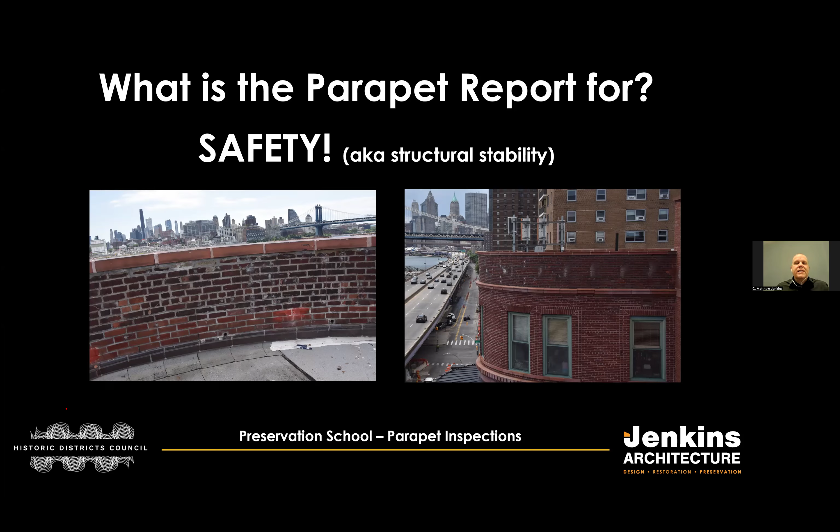Why did the DOB decide all of a sudden, a year and a half, 2 years ago, to start doing these? And it's because of safety. So the actual terminology is structural stability, meaning the parapet must be maintained in a safe condition. And what does that really mean? It means that things shouldn't be falling off of your parapet. Your parapet shouldn't be in danger of collapsing or falling onto somebody. And so that is the reason. It makes sense, right? The DOB's focus, Department of Buildings focus, is on safety. So this is what the parapet report's for.

Now, there is a crossover into something called Facade Inspection Safety Program. This is called FISP, or Local Law 11. This is for inspections required at buildings over 6 stories. It's submitted every 5 years to the DOB. You need a licensed architect or engineer. It's a crossover, but it is not the same report as a parapet report, just to make that clear. Over 6 stories, meaning if your building is below 6 stories, it's not part of the facade inspection. That is why this parapet report is essentially for all buildings. It doesn't matter if it's below 6 floors or above 6 floors.

So this started January 2024, where every owner must have an observation of the parapet performed in accordance with the rules. You can see it got distributed in November, right before January 1st, 2024. And so this is pretty much the new rules, the latest DOB direction for all buildings. So, like I said, I apologize. I want to start at the very beginning.

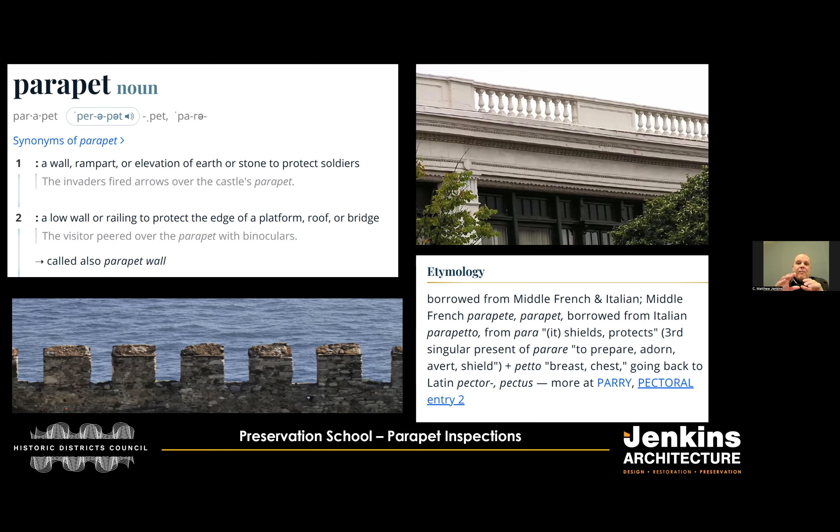What is a parapet? So Webster's definition is a wall, rampart, or elevation of earth or stone to protect soldiers. And I just love that idea that a parapet is actually something from a castle to protect soldiers during wars. It's a low wall or railing at the edge of a platform or roof, also called a parapet wall. So going back to the very basics of parapets. What is a parapet and what does it do? A parapet is an exterior wall that rises up vertically past the roof line. Typically, it will be on flat roofs.

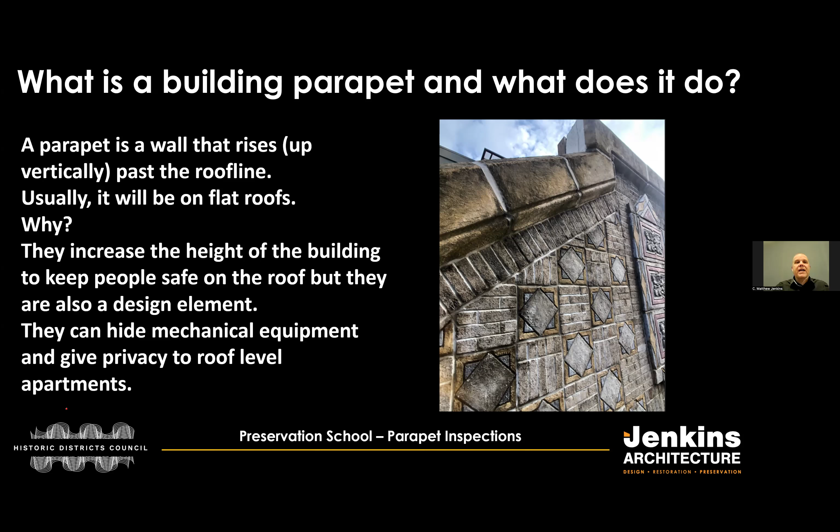And if someone were to say, well, why are they there? Well, they do a few things. They increase the height of the building to keep people safe from falling off of their roof. But also, because architects are always going to be architects, they become a design element for the building. People can put cornices on them. They can make a decorative parapet like this, with cast stone, different colors, and terracotta pieces. Also, parapets can rise up to hide mechanical equipment. They give privacy to roof level apartments too sometimes. So this is just really basic parapet terminology.

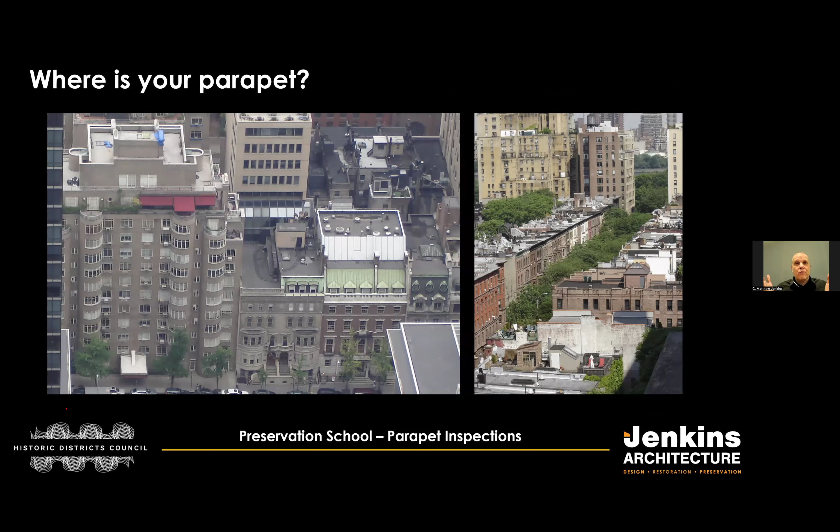So where is your parapet on your building? There is some confusion, believe it or not, about this, and I totally understand because it's all about the strict definition of what the DOB calls a parapet. So most parapets, if you go to the roof of your building or to a bulkhead of your building or to a terrace of your building, you will see a wall that rises up past.

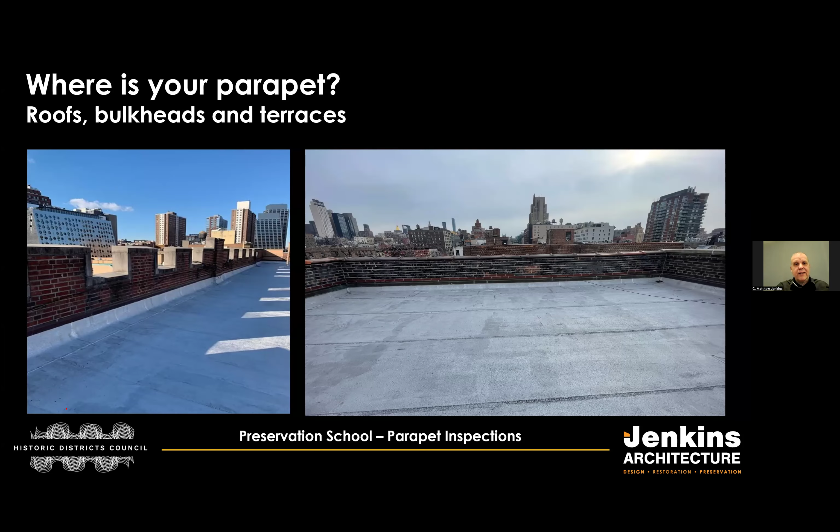What that is, that's your parapet. That is an exterior wall that rises up past the roof level. Now, like I said, there's a lot of confusion about do you have a parapet or not? And I'm going to go into detail on that. But this is where you'll typically find parapets.

So the next question, do you absolutely have to have your parapets inspected? So there are 4 basic rules on this. The requirement applies to all buildings, and the DOB has laid this out very simply, 4 topics. They say parapets that are fronting the right of way, I'll get into that in a minute, regardless of height. That means the building can be 1 story, 20 stories, regardless of height.

And then there's a few exceptions, which I'll get into in more detail too, essentially except for detached 1 and 2 family homes, which means if you have a detached 1 or 2 family home, and I'll explain detached, you don't have to do this. Also, the exception is if the building has a fence or other barrier preventing access to the exterior wall. So I'm going to talk about fronting the right of way first.

So the DOB's definition, Department of Buildings definition of a right of way is the public right of way, the public street space beyond the private property line, including the roadway and sidewalk. So that means the sidewalk, the street, anything where the public can be near your building, essentially, that is the right of way.

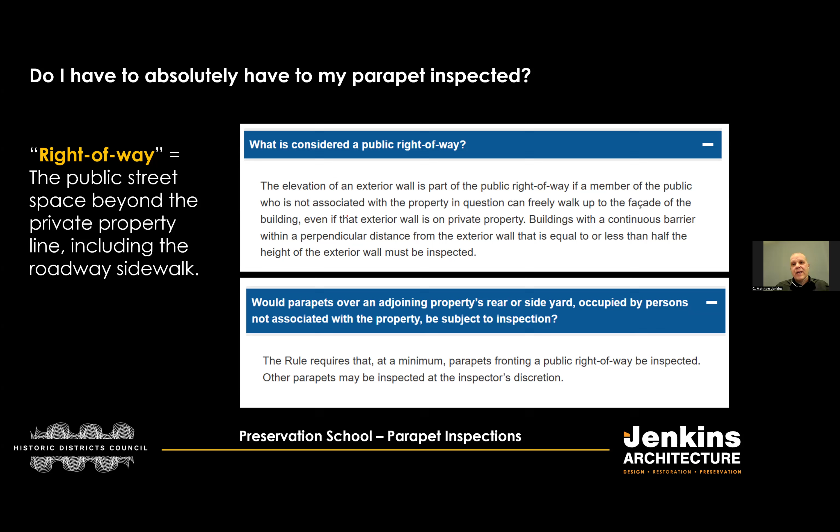Now, I don't want to ignore other parapets on the building, because once you're up there, you might as well inspect it all. But I just wanted to tell you this is what the actual written word is here. Now, regardless of height, I know this is probably the most confusing thing. Like we talked about before, Local Law 11 or FISP is over 6 stories. This is any height. If you have a 1-story building, you have to have it inspected. If you have 2 stories, 3 stories, 4 stories, this is basically every building, right? And so that's one thing I want to get across.

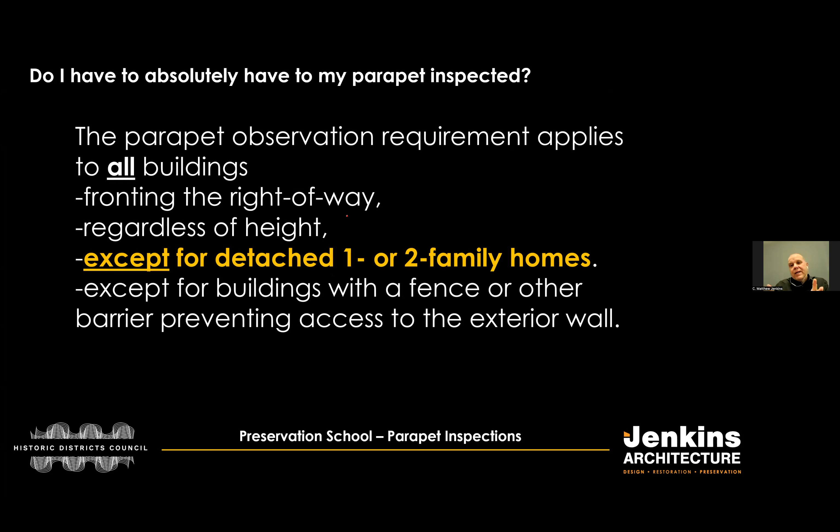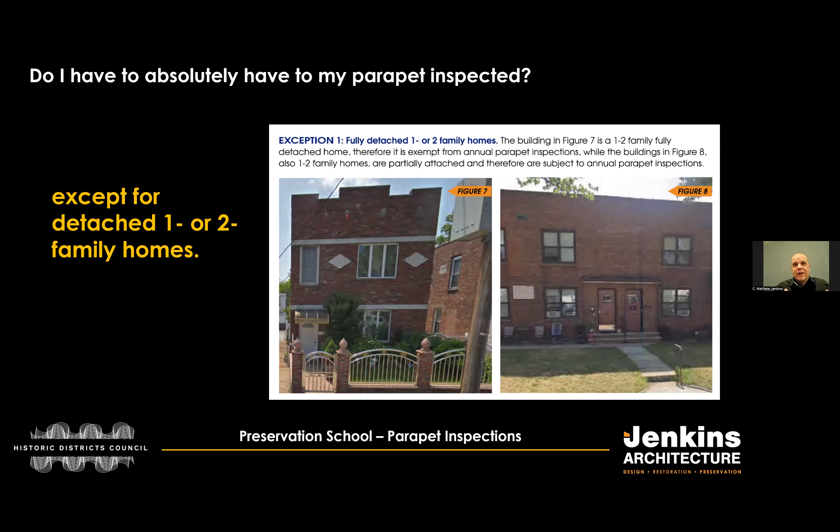Even if it's a single family home. So I just wanted to show you that's one of the images the DOB uses. Now, in my mind, a detached single family home is something like this in a neighborhood far out in Brooklyn, right? Where it's like an individual house, like in a suburb, right? That's also a detached single family home.

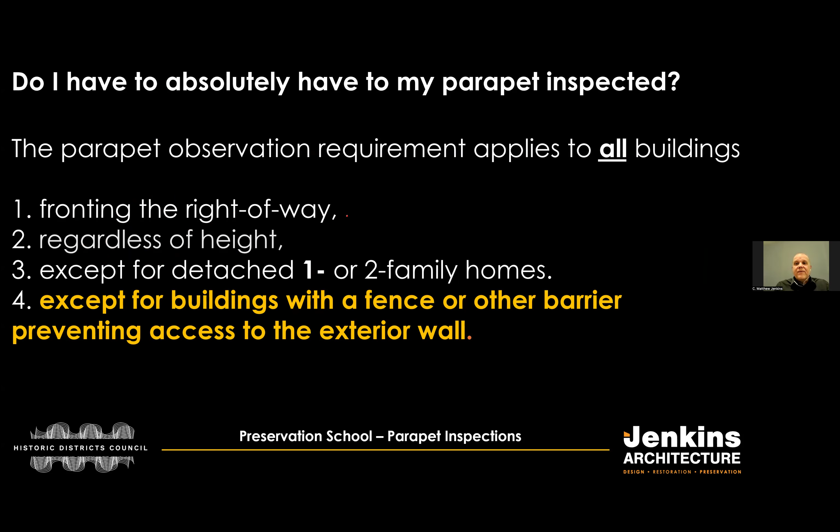So here's the thing. When I have clients call me to ask, do I need to have it inspected? I'm going to kind of err on the side of caution, right? I'm going to say, you know what, I can do the math, but I feel like it's something you should be paying attention to. The last thing you want is for the parapet that belongs to the building to fall on someone's head, right? So the idea is that this is just one of the exceptions the DOB has.

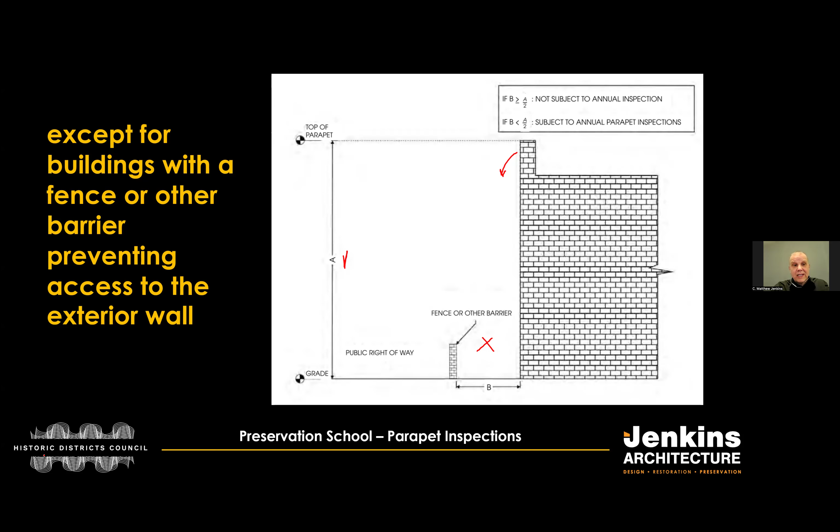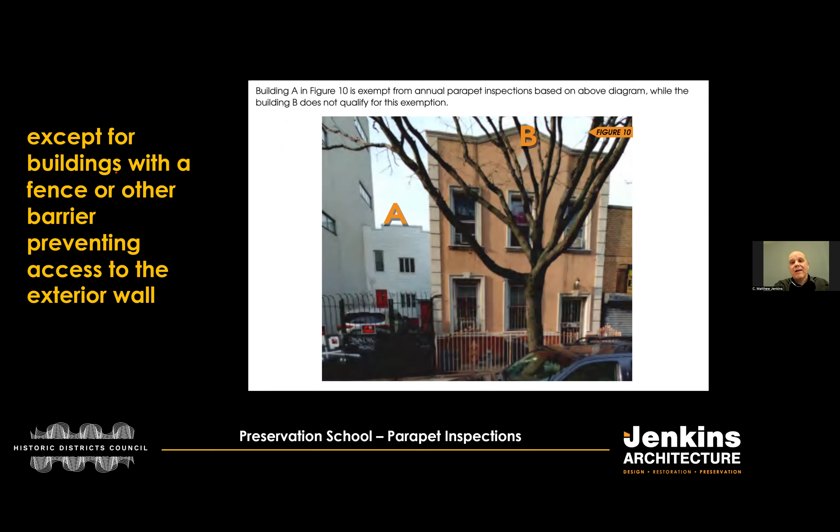Now, the DOB has made it clear. It says, what happens if I cannot see the inside of that parapet due to building geometry? So this is a little different. Basically it says, is it acceptable to physically inspect it from the outside? And this is saying yes. Essentially, fire escapes, balconies, neighboring roofs, the backyard, side yard, anything I can do to get access to actually determine the status of that parapet.

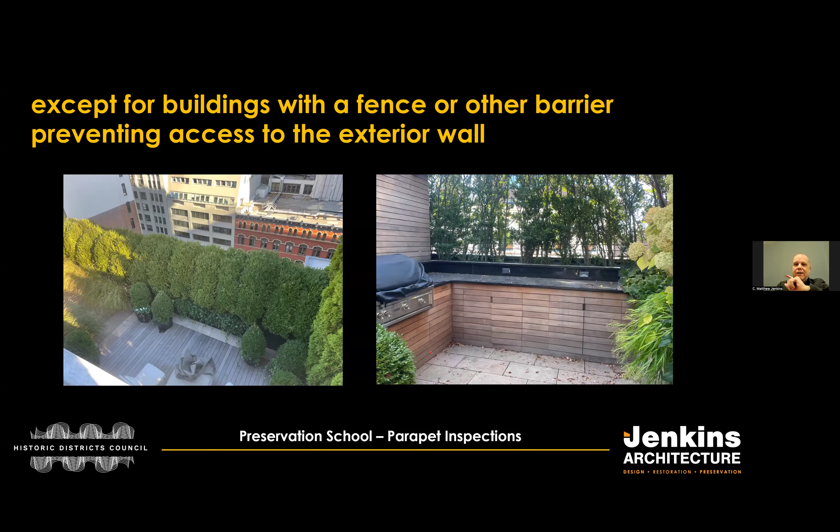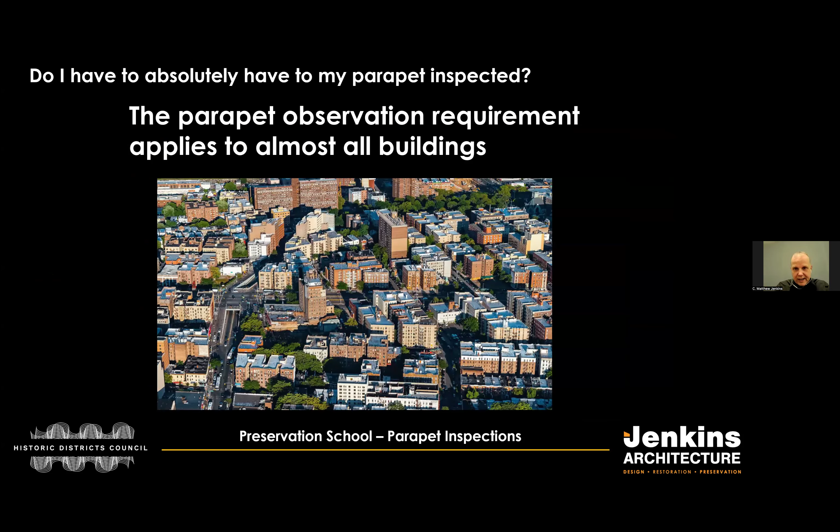So this is pretty bad, right? I mean, you cannot see through the parapet at all here. This is completely trees. There's a grill here with permanent furniture. So this is what happens sometimes, and I'm stuck doing everything I can to inspect the rest of it. Now, do you absolutely have to have your parapet inspected? And the answer is yes. Essentially it means pretty much all buildings in the entire city that have parapets, at least, okay?

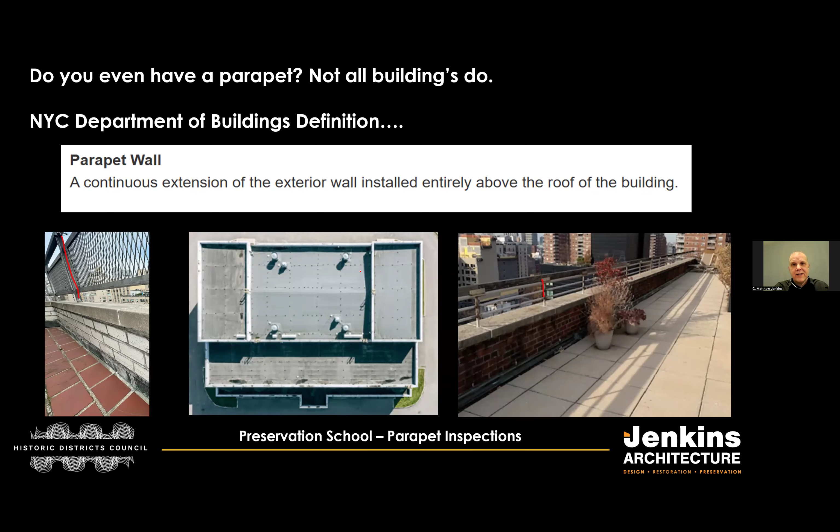Now, one of the big questions I have are people that don't even know if they have a parapet. So I just want to go through this again. It's a continuous extension of the exterior wall rising above the roof. So you could have a parapet that has a handrail on top, an even lower parapet that has a handrail on top, or a solid parapet of any kind of masonry around the building. You can see the shadow lines of the parapet all throughout this building. So just know that not all buildings do have parapets.

Now, one of the big questions I get is townhouses and brownstones. Very few brownstones and townhouses have parapets, but I'll show you the ones that do. And I'll talk about this in a minute, there's a lot of companies out there that will try to coerce you into inspecting parapets when you don't even have any. So that's another reason I really wanted to get these points across.

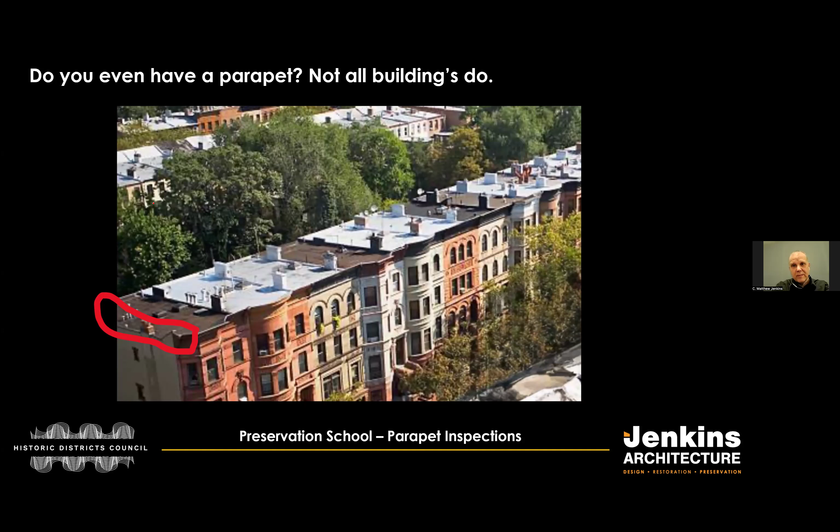So do cornices need to be inspected? The way the DOB, Department of Buildings, has laid this out, cornices attached to the front wall or roof with no parapet behind do not need to be inspected. However, cornices attached to parapet walls are required. So a lot of townhouses and brownstones, when you go up to the roof, will have towards the front of the building a slope, where it pitches up to show where the cornice actually is. It's usually above the roof.

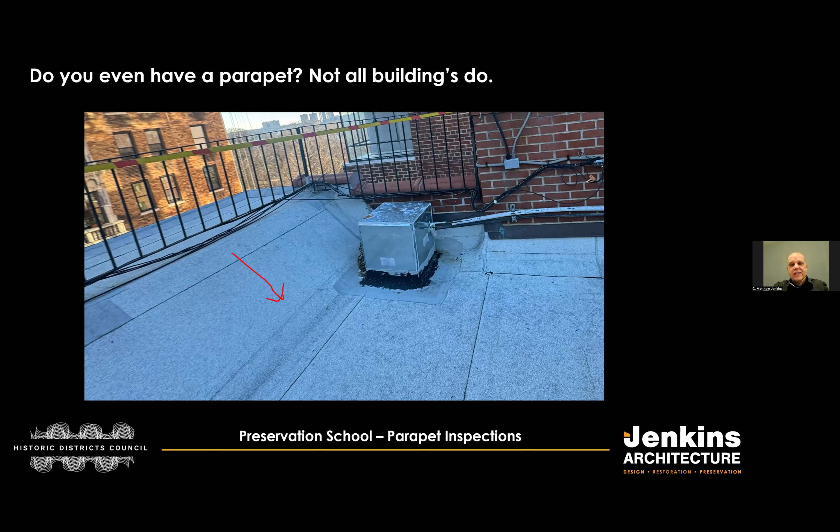And essentially the DOB is saying, if your decorative cornice at the front of your building, basically this right here, is completely covering the parapet or any kind of parapet there is, the roof itself pitches up like this, and you cannot see the parapet, it is basically exempt. Now, that said, I have seen parapets in New York City that look like this, and this is required to be inspected. This is a cornice that is attached, but you could see the backside of the parapet here.

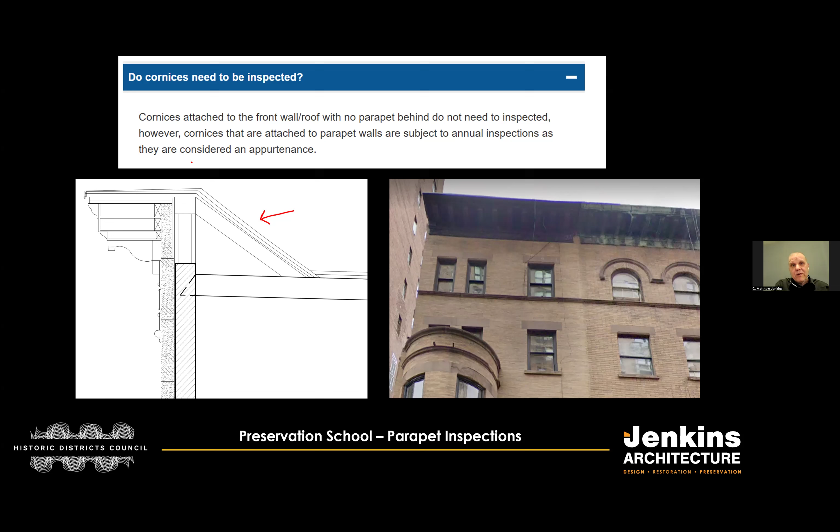Now, like I said, this is still kind of all up to the inspector too. I'm just telling you what the Department of Buildings has decided to require, what has to be inspected. I see this situation on the left here, where you cannot even see any bit of the parapet at all because it's all buried below the roof and it's all behind the cornice. So it is completely up to the inspector to decide what to inspect. However, I just wanted to give you the actual code. If you have a cornice and you can see the back of the parapet, which is exposed, then that is definitely 100% required to be inspected. Okay, hope that makes sense.

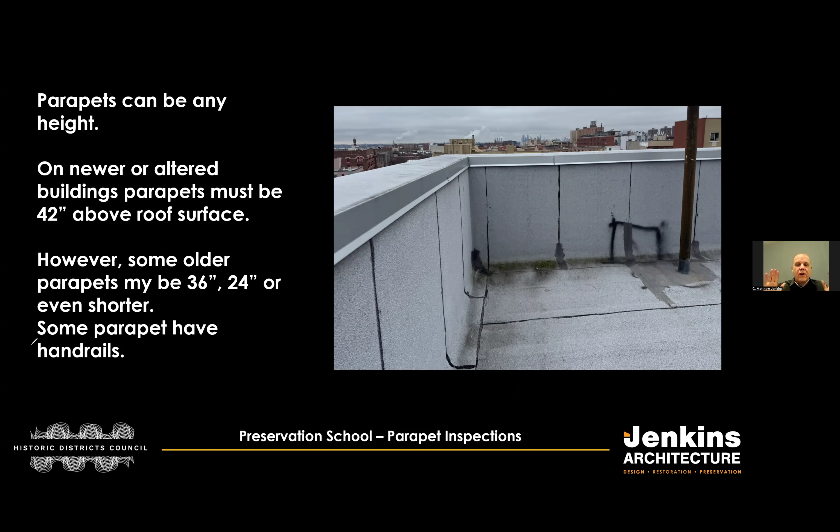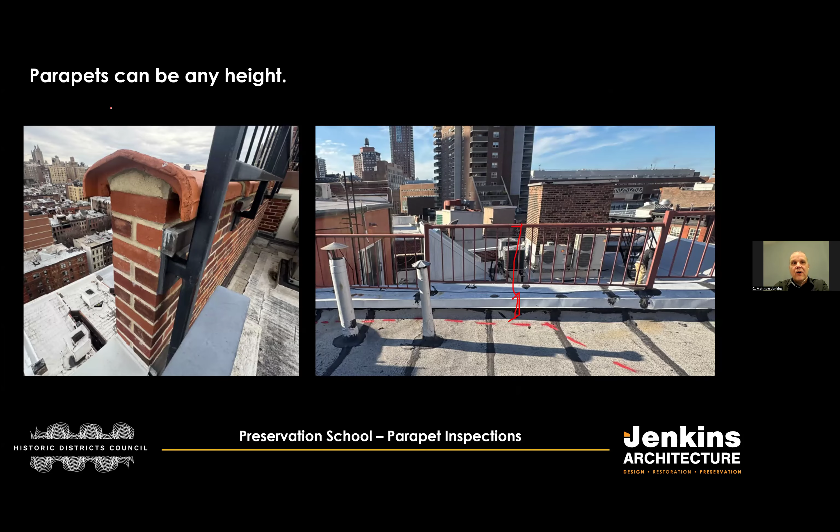Some older parapets could be 36 inches tall. Some could be 24 inches tall. Some can be even shorter. Some have handrails. So this is why every parapet is going to be different. I can tell you about new buildings, about how tall they're supposed to be, but on old buildings, you're going to find all kinds of things. So that's why it's important to understand that this is a parapet. This is a small parapet. It's about 7 inches tall, and then there's a handrail on top of that. This is typical of New York City. You're going to find all these different types of parapets in New York.

Now, one of the questions I get a lot is, is it possible to have handrails and not have parapets? And yes, it is. You can have a flat roof that pitches to a gutter just like this, and you have no parapet at all. There's no parapet rising up here. It is essentially purely just a function of the handrail doing the protection. So not all buildings have parapets. And that's why it's important to have an inspector that you trust come look and tell you if you have one or not. I'm going to tell you something really frustrating in a minute.

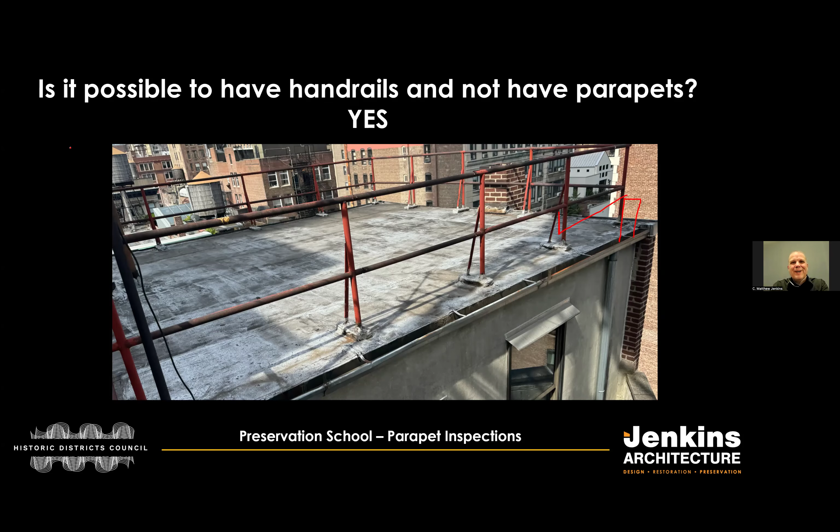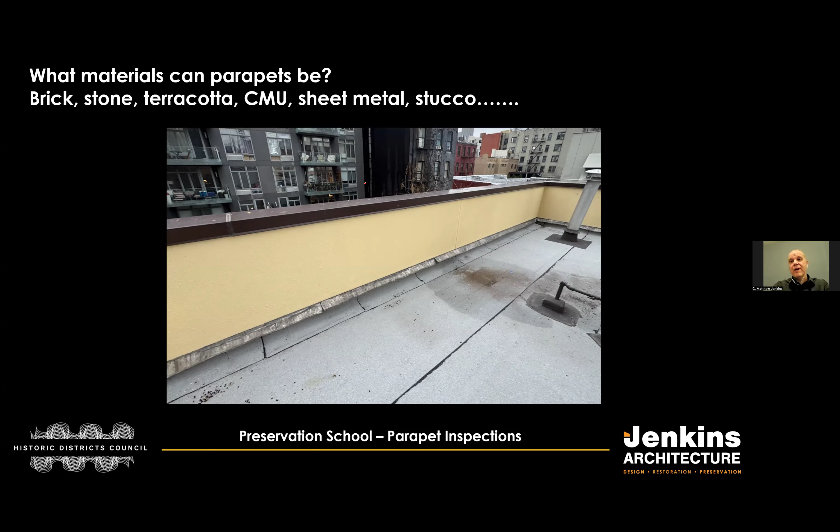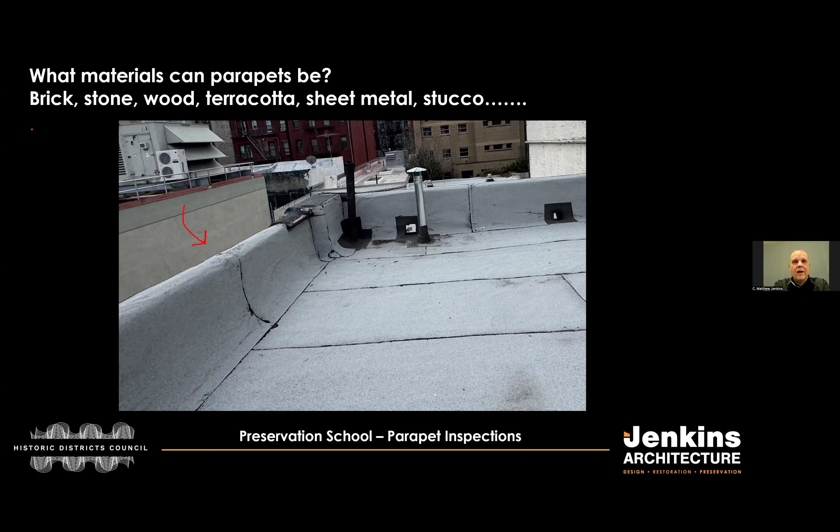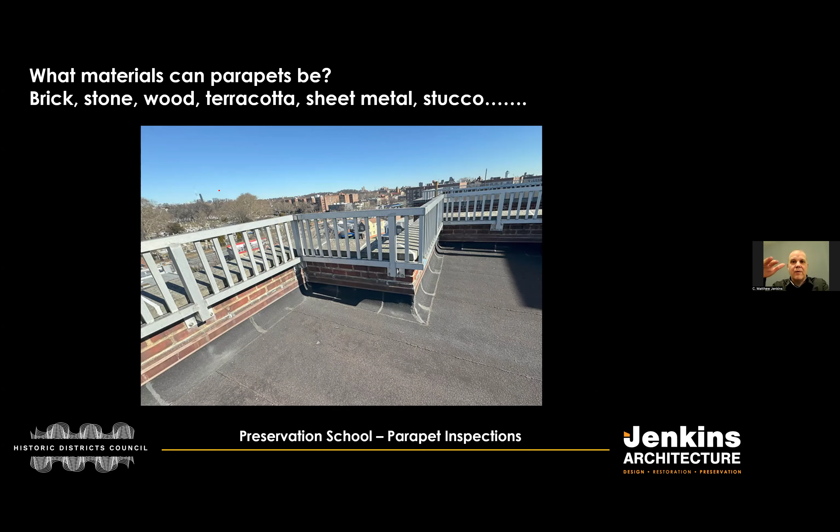And remember when I mentioned that on fancier buildings the architects are going to design their parapet. This is a terracotta parapet with brick infill, with a custom handrail. This is a 1940s building, and this is typical. It's a low parapet in some places and a higher parapet in other places. So, as I said, you never know what you're going to find when you go upstairs.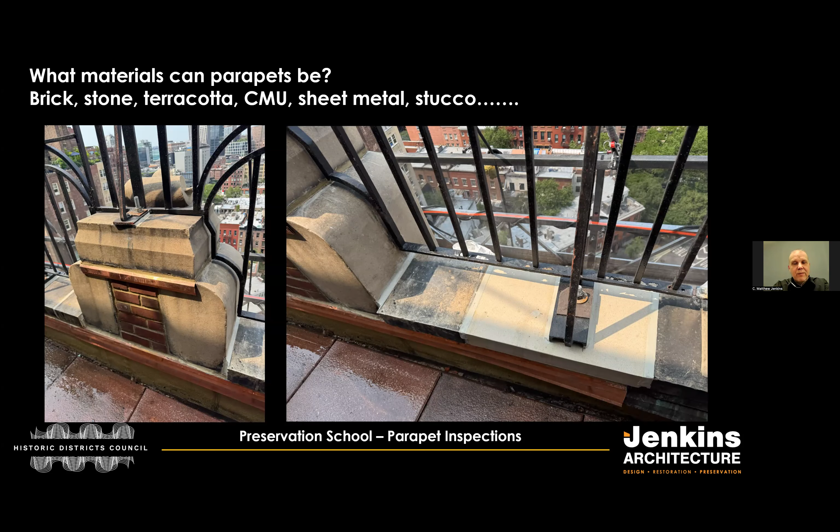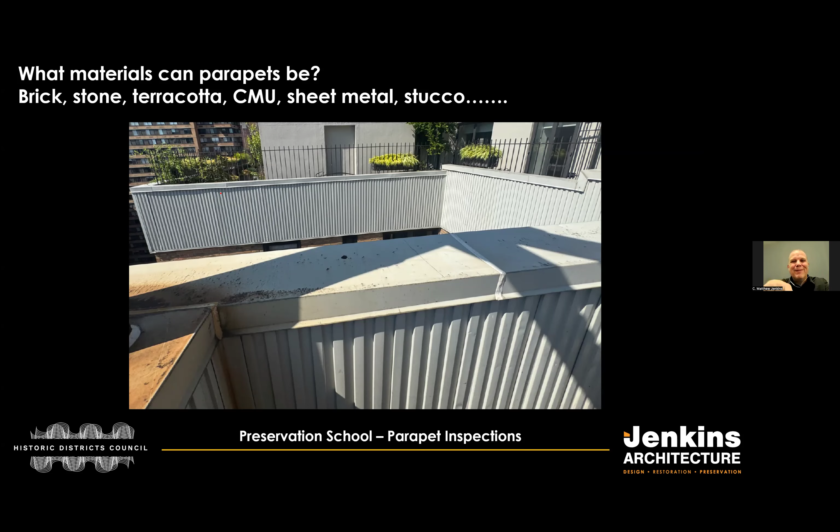Here's a parapet. I can't remember if it's the Upper East Side or Upper West Side, but this was a tall building that clad its parapets in sheet metal. Makes the parapet inspection a little more difficult, right? Because everything is covered. I don't know why this happened; most likely it was leaks. I don't know if they did this because something was wrong, but this is something that I usually don't recommend clients do. This was a temporary fix to cover something, most likely a leak.

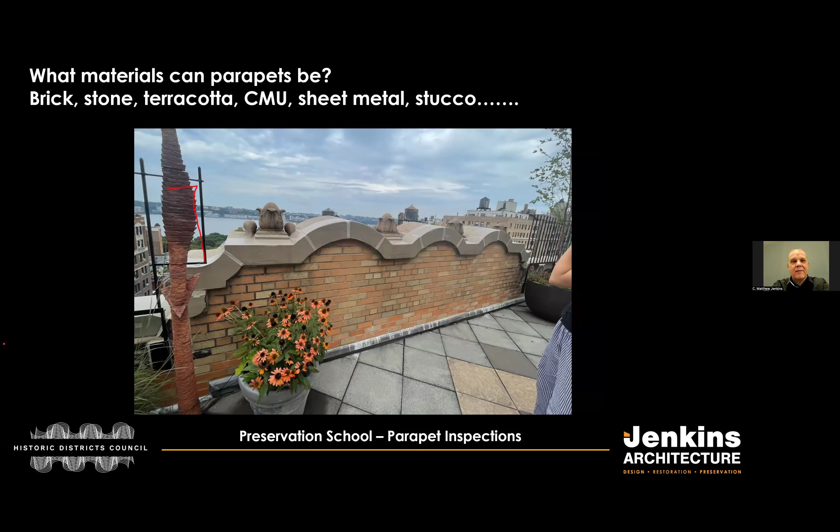Here's another decorative parapet. This is Upper West Side. It's got curved terracotta shapes and details on it, decorative elements, right? This is an architect doing what architects do, designing something really interesting with your parapet. It's still a safety thing. And you can see here on the side, this also has handrails that attach up. So like I said, you never know what you're going to find when you're looking at an actual parapet.

Now, here's the thing that I think most people are confused about with the parapet inspection. For the FISP or local law report, remember it's above 6 stories, you are required to engage a licensed architect or a licensed engineer to inspect and submit. It's every 5 years now; I think that's going to change in the future. That is required for FISP or local law reports.

Here's the most shocking thing about the parapets. For yearly parapet reports, you need one of these: a super, handyman, a mason, a contractor, a person in a similar construction trade, an architect, an engineer, an insurance inspector, a New York State inspector, or any individual capable of identifying hazards on the parapet. That leaves this wide open.

So I've had clients ask me, hey, I know a little bit about construction, could I inspect the parapet? And I say, yes, you can. That is the oddest thing about this inspection. I don't know why the Department of Buildings decided that, but it makes it easier, right? You need one of these things.

Now, here's the thing, and I think it's a little frustrating. I have seen on websites of architects and engineers in New York City that they'll write that you're required to have a licensed architect or engineer do your parapet reports. Is it smart to have a licensed architect or engineer? Sure. They're probably going to know a little more than a super, an inspector or a contractor. However, you do not have to have that person.

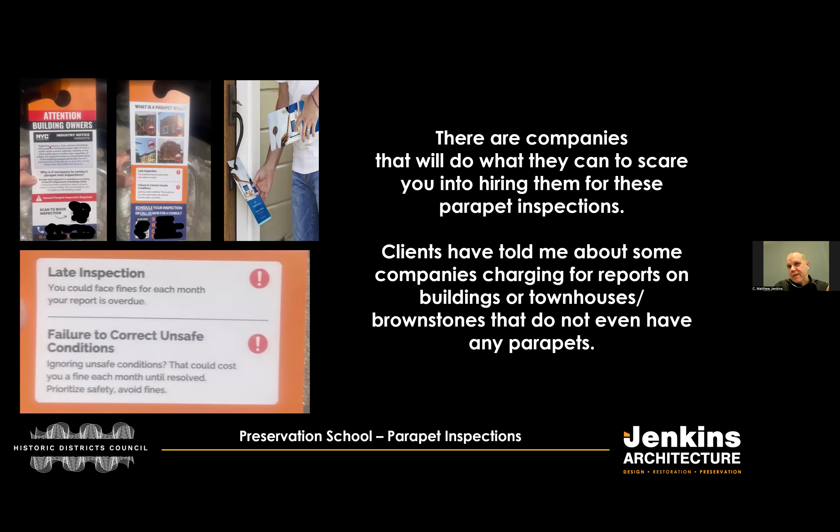So this is the saddest thing. I've heard clients tell me that they paid someone to do their parapet inspection, not me, and it turned out they didn't even have a parapet. So I just want to get across that there's a lot of fear, especially in neighborhoods in Brooklyn where you've got rows and rows of brownstones and townhouses, and they may or may not have parapets. So that's why I think it's important to find someone you trust. If it's your super, a contractor, an architect or engineer you trust, I feel like that's the best bet. But there are a lot of false things out there, so that's why I really wanted to get this across.

Now, what is this parapet inspection, and how does any inspector submit this report? It's just like any inspection report. It's about figuring out what's going on with the building to keep the building safe. So this is the other strange thing about the parapet inspection. You do not submit this to the Department of Buildings. It is not submitted in any way, shape, or form. And I know that sounds strange because I just talked about Local Law 11 or FISP, which is submitted every 5 years by a licensed person. This one is not submitted. What this means is that the Department of Buildings wants you to almost self-police your own buildings.

Now I'm going to give you an example. About 6 months ago, I went to a building and I climbed up to the roof. It was a brownstone townhouse type building, and it did have one parapet. And the owner came up there with me, and he said, "Oh, wow, I haven't been on this roof in 25 years." He owned this building and he's never been on the roof. And in my mind, that connected the dots. This report is really to get owners of buildings to start paying more attention. If a building is not subject to the FISP or Local Law 11 report, over 6 stories, then chances are maybe you haven't paid as much attention as you should to your parapet. No submission to the Department of Buildings is required.

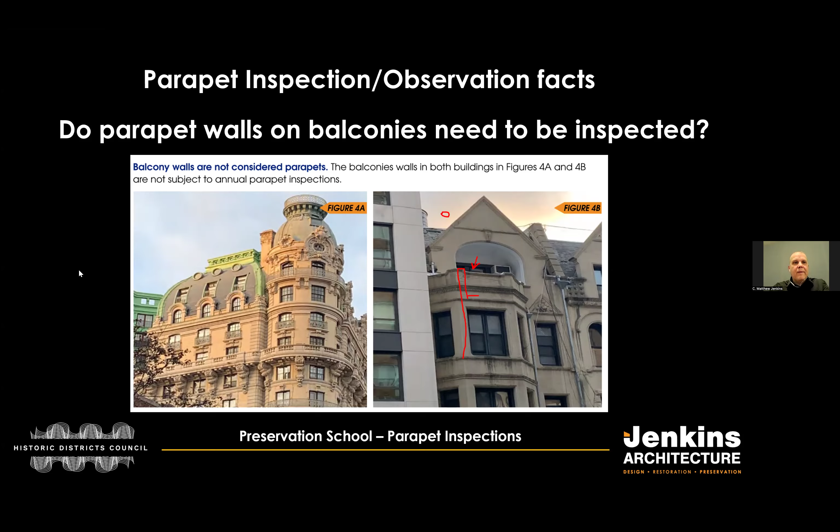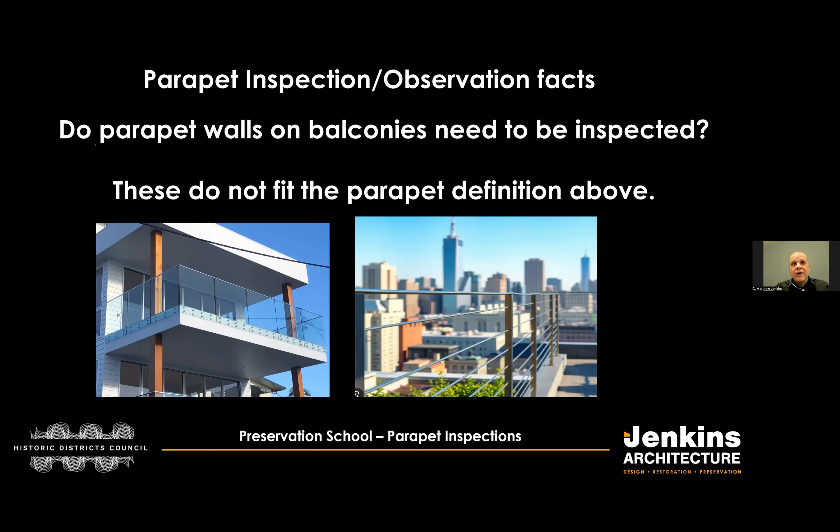Another thing that doesn't fit a parapet definition is a terrace like this. So if you have a newer building or even an older building that has maybe glass handrails or wire handrails, they do not fit the definition of a parapet or are required in a parapet inspection. Now, what is the parapet inspection? Like, what do you actually have to do? So the wording is very simple.

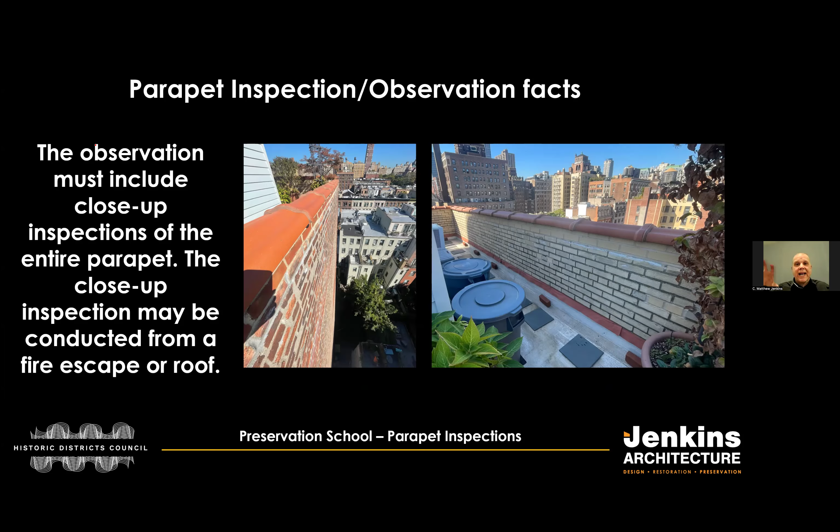The observation must include close-up inspections of the parapet, which means your inspector is going to be trying to get as close as they can to the outside and the inside of every parapet wall. It can be done from a fire escape or a roof. So I lean over a lot of parapets, needless to say, right, when I'm looking at both sides. I want to go through the observation must include these 3 points. I'm only going to call out a few of these, but the determination if the parapet is plumb, and I'll talk about that in a minute.

And then it goes into all the things that I typically am looking at anyway: deterioration of parapets, cracking, loose bricks, loose coping stones, deteriorated mortar joints, spalling or rot. So typical bad things, right, that you don't want happening on your building. The second thing is that everything that's attached to that parapet is also in the report: telecommunications equipment, railings, access rails, ladders, handrail attachments, fire escapes, and signs. They also must be inspected. If it's on the parapet, it has to be inspected.

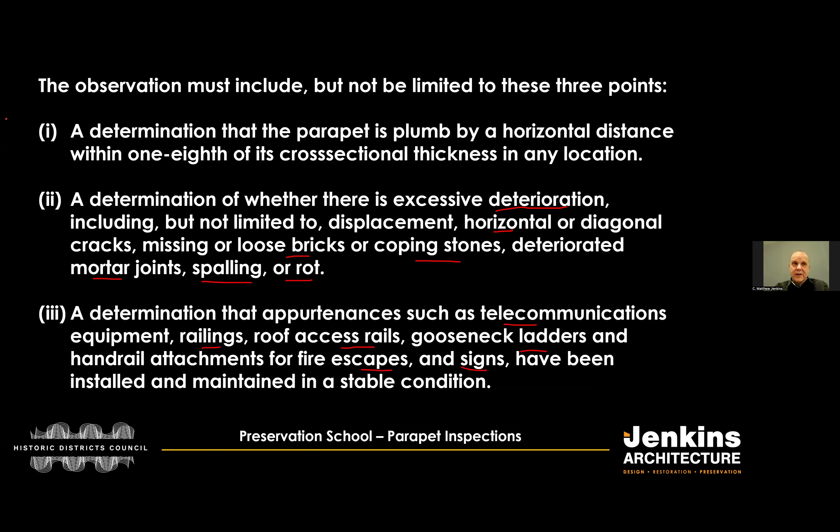So first thing I want to get across is this word plumb. So the plumb definition is a weight. This goes back to Roman times and Egyptian, right? They would hold a line, some type of rope or wire with a weight at the bottom of it, to figure out a perfect vertical line. And the inspector needs to use a plumb, called a plumb bob, to show that the parapet is not leaning. It's not changing direction. Parapets do that, believe it or not.

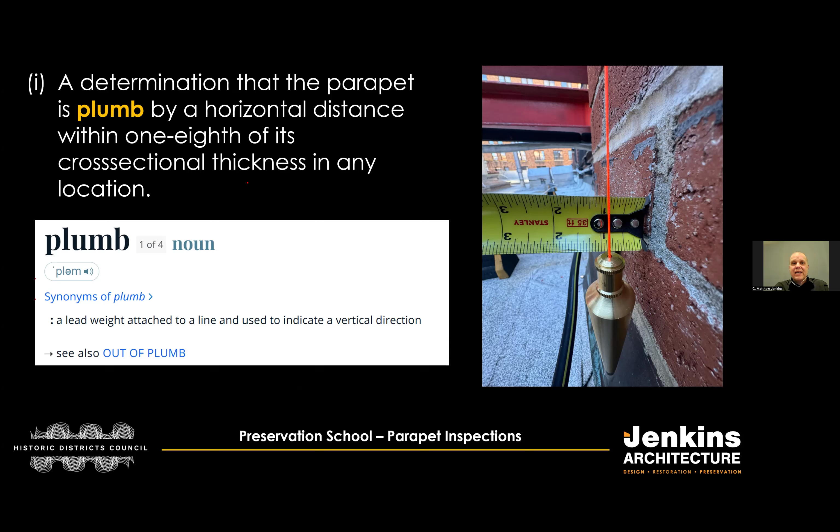They actually can lean. So basically, it has to be in plumb within 1/8 of its cross-sectional thickness in any location. So typically I use a plumb bob, and I have one of these in my pocket and I carry it around with me pretty much all the time; even though I might not be doing an inspection today, I still have it with me. But essentially this is a way to show that the parapet is not leaning. All right, so that's the first thing in that list.

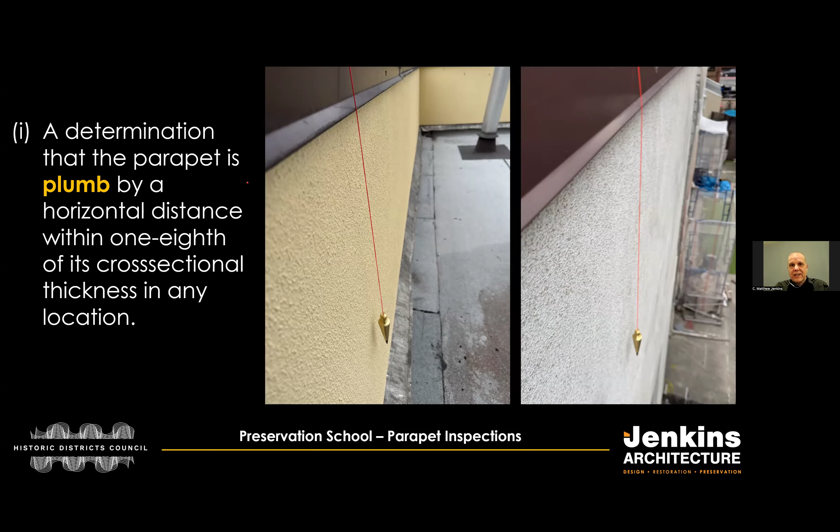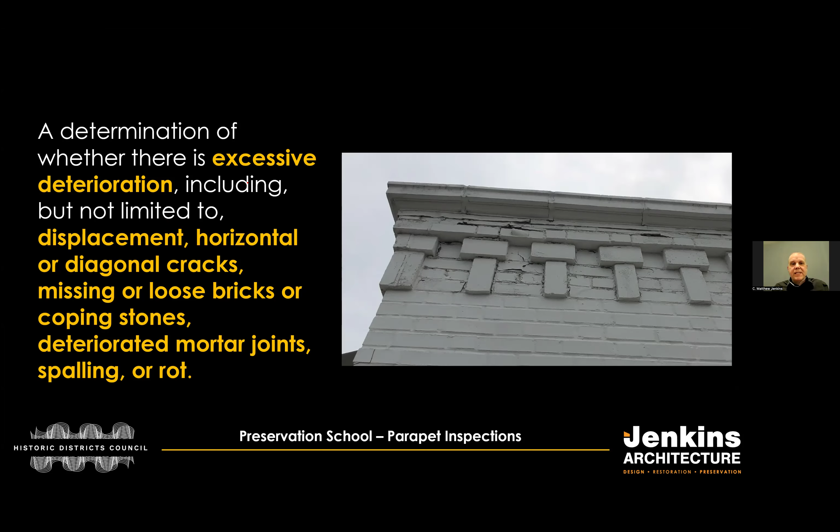The second thing is displacement, cracks, loose bricks, coping stones, and mortar joints. So this is kind of the obvious one too, right? But it's only obvious if you actually are going to your roof and looking at your parapet. Like I said, when a client comes to me and says, I haven't been on my roof in 20 years, I might expect to find something up there, right? Some issues. So cracks, loose bricks, missing bricks, coping stones moving and shifting, deteriorated mortar joints.

So you look for things like this. You look for cracking, you look for movement, you look for issues that happen with all buildings. All right, the parapet takes a lot of abuse. Think about this. A parapet gets wind and rain from the outside, from the top, and also from the back. So it's taking the most abuse of any part of the building, more than the roof even, right? So that's another reason I think this report is important to do no matter what.

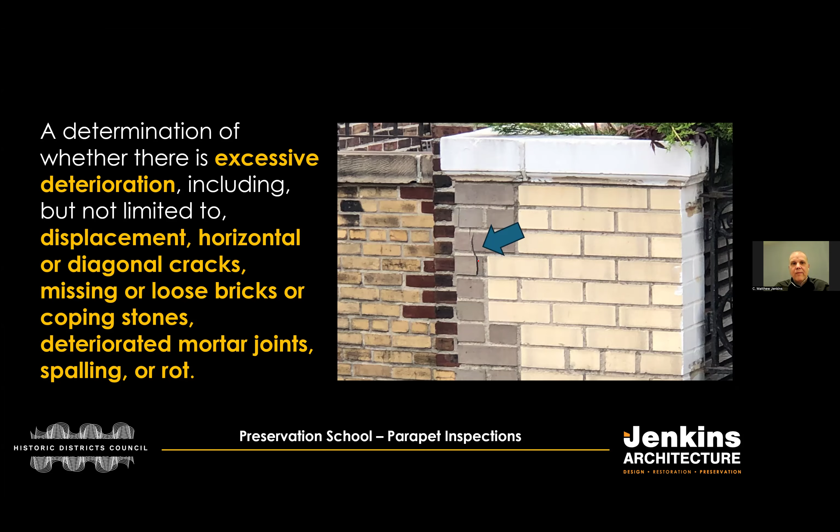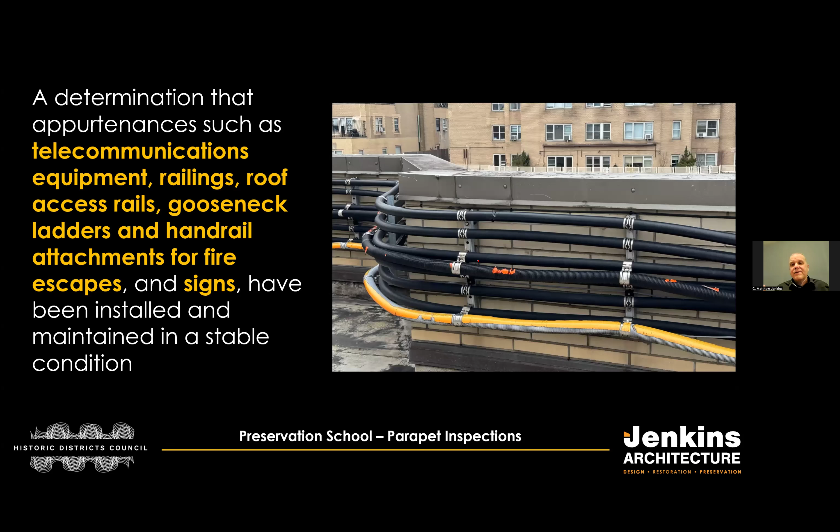Remember, this is about safety, right? So handrails, even though the parapet might be fine, the handrails are now part of this, right? Because they're attached to the parapet. So that's something that has to be inspected. Now, what if there are hazardous or unsafe conditions? So this is where people are actually going to be called out on things. Essentially, the person performing the observation must notify the Department of Buildings. We'll talk about how in a minute.

The second thing is, if there are hazardous conditions and if your inspector notifies the Department of Buildings, hopefully they tell you first at least, you must install public protection, essentially sidewalk shed, fence, netting, whatever it is, and you must remedy that condition within 90 days. Notifying the Department of Buildings: believe it or not, there's a new email, parapets@buildings.nyc.gov. But to make it even easier, you could also just call 311 and notify the Department of Buildings.

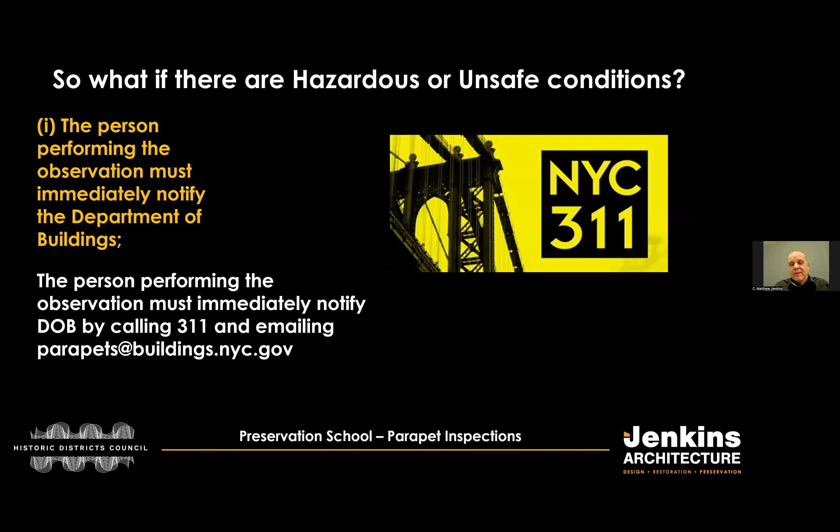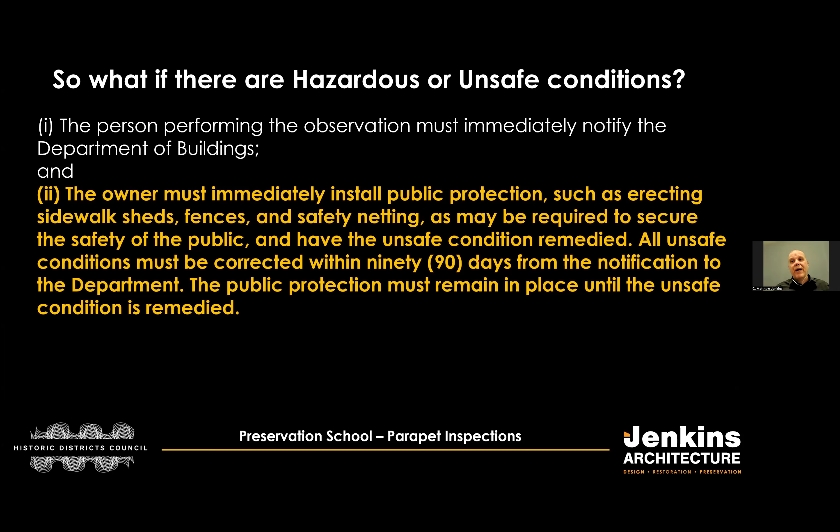At the same time, the client should be putting up protection. So the DOB laid it out as sidewalk sheds, fences, or netting, anything that's required to secure the safety of the public until that condition is repaired or remedied. And so that is where a sidewalk shed could come into play here. I know the city's been trying to get down sidewalk sheds, but this is a condition on any size building. So you remember Local Law 11 and FISP is over 6 stories. This could be a 2-story building, 3-story building, a 1-story building, right? It's about keeping the public safe.

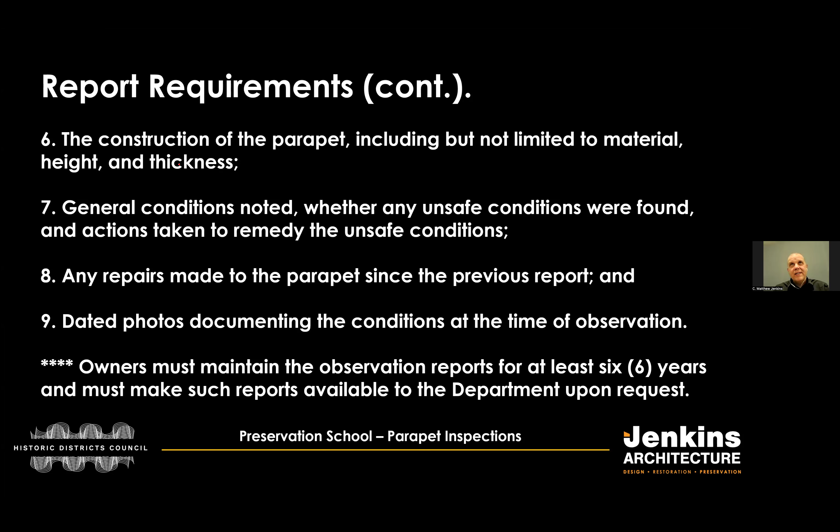Anything to look out for when inspecting a building where steel braces have been installed on the interior side? Yeah, so a lot of tall, skinny parapets throughout the city have had structural reinforcement essentially installed. It's just so the parapet, the rules are the same. It doesn't matter what the construction is. You're looking for those things that I brought up, those three items.

You're looking for a determination if it's unplumb or not, a determination if there's any kinds of issues like cracks, loose bricks, mortar joints, and then anything that's attached to that parapet. So it's pretty much the same, no matter what extra things have been installed as reinforcement. Does that answer that question?